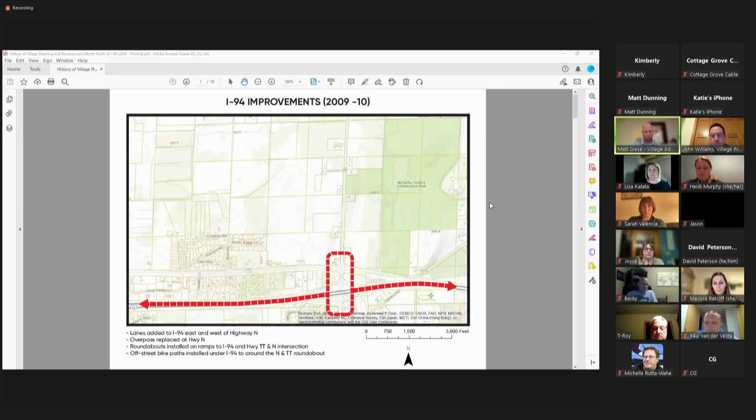The village's 2009 efforts drew interest from private landowners north of I-94, and those owners petitioned the village to annex their property into the village from the town of Sun Prairie in 2010. This was a 220-acre annexation, and as I move through these slides, please note the owners' names on the land and how these names change over time. Each landowner and developer they may work with has their own specific and potentially different development plans and concepts, but any such plan has to be consistent with the village's land use plan, which is what the village evaluates during the approval process.

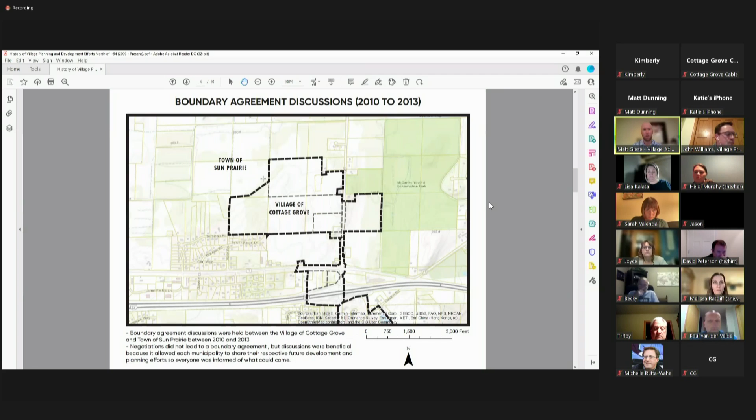Between 2011 and 2012, the village added land into our urban service area and also amended TIF district number 5. Urban service area is an approval process needed for the village to extend sanitary sewer services to a development. The process generally revolves around stormwater management and water quality. The Capital Area Regional Planning Commission reviews and recommends approval, with Wisconsin DNR having the final say.

The village also amended our TIF district number 5, commonly referred to as the Commerce Park. That's where Summit and Johnson Health Tech are located. This was done to help promote development of the 11-acre Huston site, west of the Park and Ride. To date, there has been an approved planned unit development for a hotel, but at this time that hasn't moved forward with actual development.

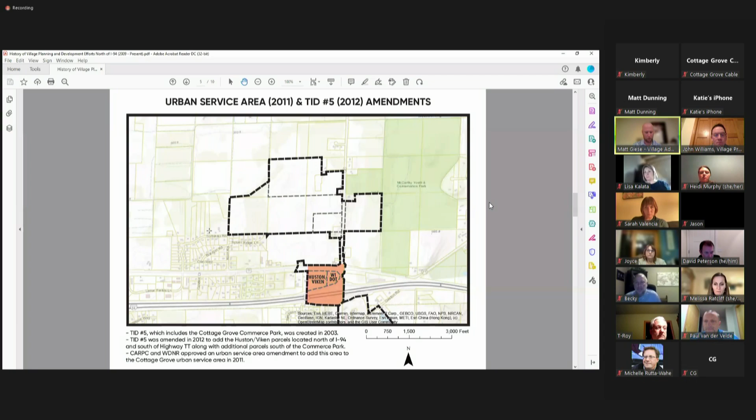In 2018, the village, in collaboration with Dane County, Sun Prairie School District, and Madison College, established the 220-acre TIF district number 10. The district was established with goals of creating significant growth in tax base as well as job creation. With the village's Commerce Park nearly fully developed, TID 10 is the village's only remaining opportunity for large-scale economic development. It's worth noting that school district boundaries are not set by the village. All land north of I-94 has always been in the Sun Prairie School District.

This is a good time to also clear up some myths that are out there regarding TIF districts. All properties within TIF districts must pay their full property tax bills.

When a TIF district is established, the property tax revenue currently being generated by the existing property continues to go to each taxing jurisdiction. As development occurs, the village gets to keep 100% of all new tax revenue. The village then utilizes this new revenue to improve infrastructure, attract development, and spend the funds on any approved projects in the TID's project plan. Following closure of the district, any remaining money is split proportionally with the village, the school district, the county, and the tech school. And then the theory is each entity is now left with presumably a much higher tax base than they previously had, but for the tax increment district.

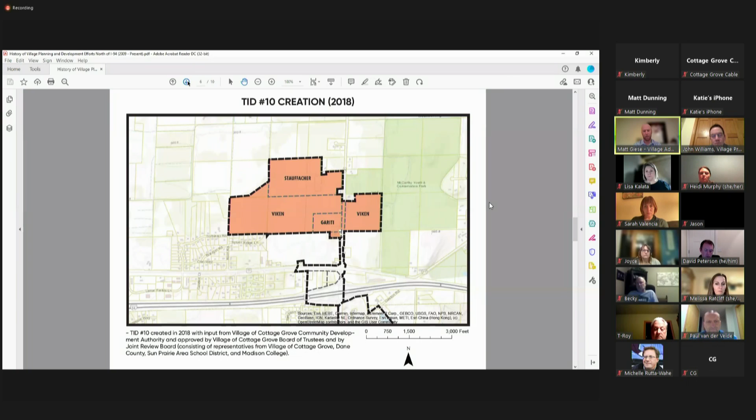In 2019, Greywolf Partners, also known as Cottage Grove Business Development, purchased about 60 acres from the Duschock family and petitioned the village for annexation into the village from the town of Sun Prairie. Following annexation, the village amended TIF district number 10 to include the newly annexed Greywolf land, expanding the TIF district to its now current approximate 280 acres.

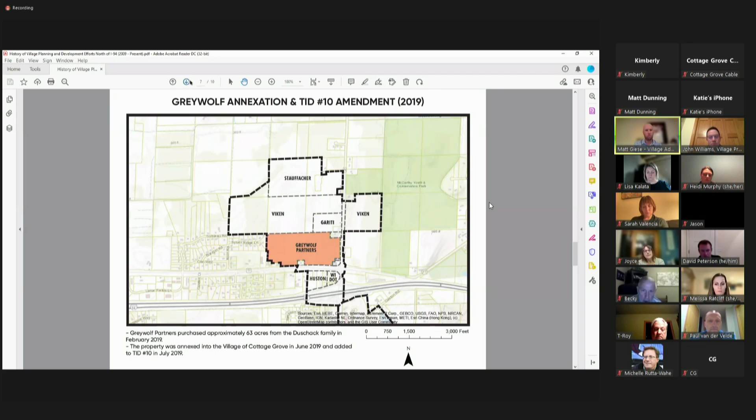Also during this time, the village went through a comp plan update process. The newly amended comp plan removed land uses that would have allowed for large-scale retail and multifamily residential uses. The large-scale retail would have included potential users such as a super Walmart or super Target. So those were removed at that time, and it was changed to just planned office and industrial. The majority of the TID remained as an area that includes warehouse and distribution, which has always been in the village's plans for this area.

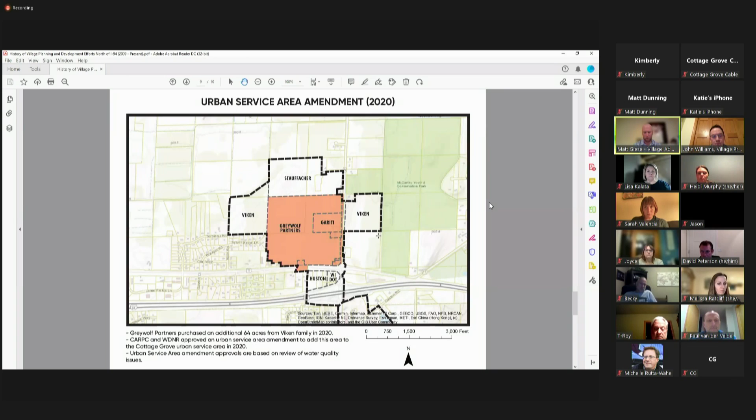In 2020, Greywolf added to their acreage in the district by purchasing about 60 acres from Mr. Viken. The village then went through another urban service area amendment process with the Capital Area Regional Planning Commission and DNR. The approvals grant the village authority to extend sanitary sewer service to develop the highlighted area.

All of the aforementioned steps and strategies have led the village to the opportunity in front of us tonight. In December of 2021, Trammell Crow Company submitted an application for planned unit development zoning to develop a warehouse and distribution facility per the village's planned industrial and office land use plans. And as you can see on this slide, the change in land ownership as well.

A couple other items to clear up. The village often hears citizens wonder why they are just hearing about a particular project now, or haven't heard about it as long as they would have liked to. This happens for a couple of reasons. The first is the village should not and cannot air or make public private landowners or developers due diligence. The village does not make a project public until the developer formally applies for a project or until a developer decides to bring a concept forward to the public for comment. This is a standard best practice for most cities and villages across the country, if not all.

The village also has ordinances that require direct notification about certain approval processes to other properties within 400 feet of the proposed project. While we certainly understand there are often people beyond that distance that would like to be notified, this village requirement is double the distance that most municipalities have for notice.

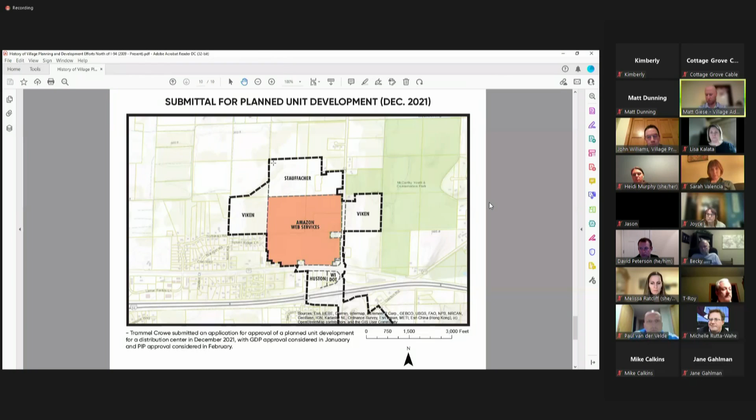Yes, the school district tax revenue would go to the Sun Prairie School District, but that is the case for any land north of I-94, and that's always been the case. As I mentioned, the village doesn't control school district boundaries. It's safe to say that Project Silver Eagle will drive interest in village development far outside of TIF District number 10, which will certainly benefit all village residents and Monona Grove School District property taxpayers.

John, I'm happy to take some questions. All right, any questions for Matt from board members?

Matt, this is Sarah. Can you just clarify, you said 4.6 million annually in tax revenue—is that before the TIF closes? That's correct, that's while the TIF is open. Okay, thank you.

And Matt, just for clarity again, through this entire process, people within 400 feet have been notified about zoning changes, all of that stuff, correct? Zoning changes, yes.

Just to add on to that, Troy, this is the zoning change. It was annexed in as rural holding, and that's what it is today until any final approval is made. So the planned unit development is the new zoning category if it is approved.

Thanks, Aaron. Any other questions for Matt? Otherwise, we'll switch gears here and move to TC, Trammell Crow.

Thank you, John, and everyone here tonight. I'm going to quickly run through a presentation and before jumping into that, introduce my team. My name is Morgan Bear-Blaska, I work with Trammell Crow Company, the developer behind this project. Here with me tonight, also from Trammell Crow, is Grady Hamilton, who leads our Midwest business unit. Adam Artz from Pinnacle Engineering is here as well.

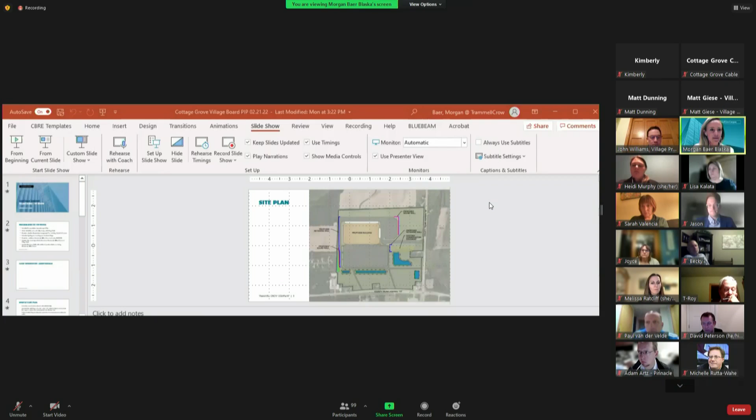He's going to dive deep into the stormwater plan and some other items in our presentation, and is here to answer any additional questions from a civil perspective. We also have Jason Banglis from the client here to share a little bit more about the client and their operations. So with that, I'm going to share my screen. Do you guys see it? Yes, Morgan, we see it. Great, thank you so much.

So what I wanted to share here to start the presentation is the progress that's been made since we were last in front of the village board for the GDP review specifically. We have submitted the transportation impact analysis, the TIA, to the village, to the county, and to WisDOT. As you guys know, for any project of this scale, this is a required step in the process and is very collaborative—we work closely with the village, county, and WisDOT on all the assumptions that go into this, as well as any final required improvements.

We want to highlight that we've submitted this, but it's very much in progress as we continue discussion with those jurisdictional authorities. Another important point is we have kicked off offsite and onsite utility design with village staff. This is not just to accommodate our facility, but really all of the options we're evaluating to service the entire TID 10, as well as the parcel directly to our west.

That's been a very important topic of conversation, and we are fully committed to supporting those village goals from a utility perspective. We've also created a detailed stormwater management plan, which is under review by village staff - this is kind of the first step in the PIP submittal. We've also included a private well memo because we know there were a lot of questions regarding that. Adam on our team will share more later in this presentation, specifically around that stormwater detail. We've also submitted a lighting plan, including spec sheets and a photometric plan to the village, since it's really important to hit all village and county ordinances, and providing this information upfront is a very important step of this project.

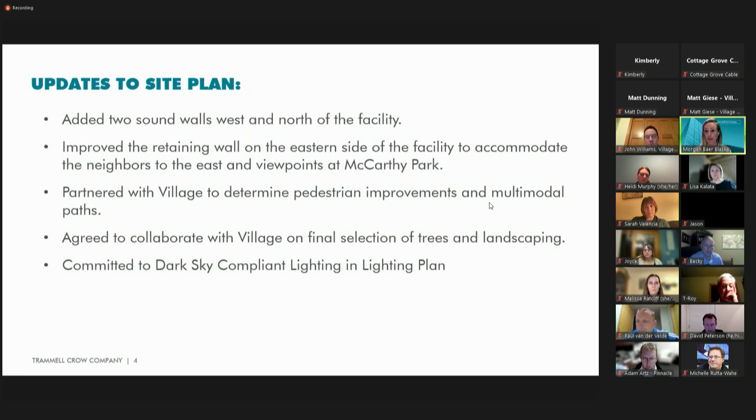And lastly, we've committed to dark sky compliant lighting in our lighting plan. This is at the highest end of visual protection, something we're committing to on all of our external outside lights. So with that, I'll show the site plan so we can see some of these elements I discussed, as well as highlight some of the other items that were originally in the design.

We'll start with the retaining walls. The proposed retaining walls on the western and eastern portions are very important. Moving from west to east, there is an incredible topo change, about a full 44 feet moving from west to east and about 20 feet just to our property line. That grade change in elevation means we need a significant proposed retaining wall to support the facility as well as our properties to the west. This also acts as a sound and light barrier to our neighbors.

On top of that proposed retaining wall, we've added an additional sound wall on the western and northeast portion of our site, as well as a landscaping buffer. All of those items are designed with our neighbors in mind to best protect from a sound and light perspective.

I want to call out this existing conservation easement, as well as the wetlands located here, which really prevent us from shifting our building footprint east. We also want to be cognizant of the residential receptors on the eastern side, and keeping as much distance from them and our truck courts as possible is an important design consideration.

To quickly hit upon traffic, which is a really important topic, this is very core to any development of this scale, and of our project specifically. Safety is the most important consideration here, and we work closely with all jurisdictional authorities to ensure that we are not just meeting, but surpassing requirements.

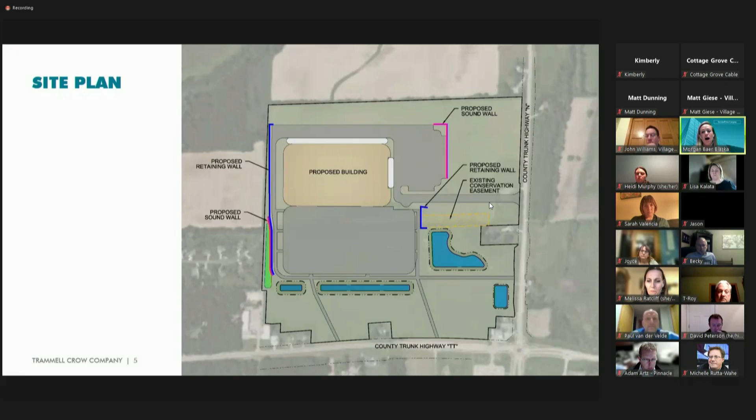With that, I just wanted to pass it along to Adam on my team to share a little bit more about our stormwater management plan and where we sit today.

Thank you, Morgan. As Morgan mentioned, my name is Adam Artz from Pinnacle Engineering Group. I am a Wisconsin-based engineer, a professional engineer, and a Department of Agricultural Trade and Consumer Protection official drainage engineer as well, so I can speak on this from a professional engineering standpoint.

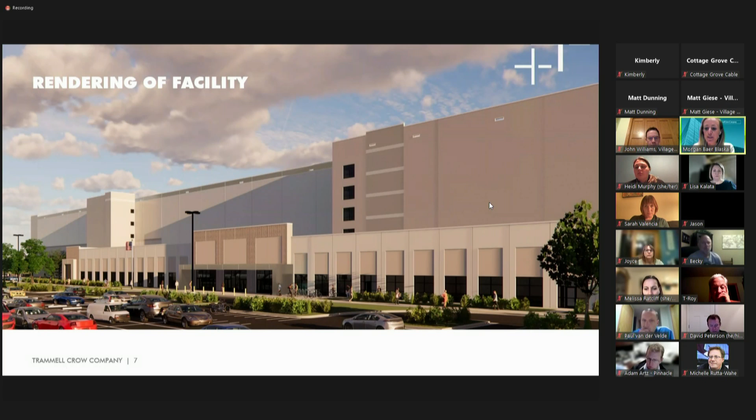So with that, here's a quick rendering of the facility. This showcases the alternating metal panels and precast on the exterior, as well as some proposed landscaping. And then these next couple of slides are just perspective views put together by our design modeling software, utilizing existing Google Maps and then our proposed facility based on the height and access points.

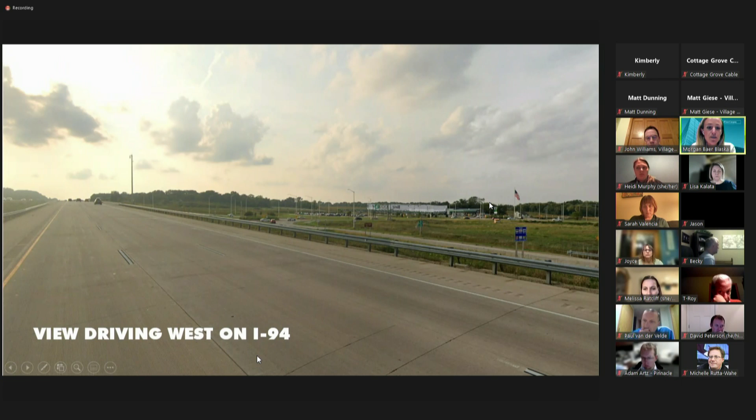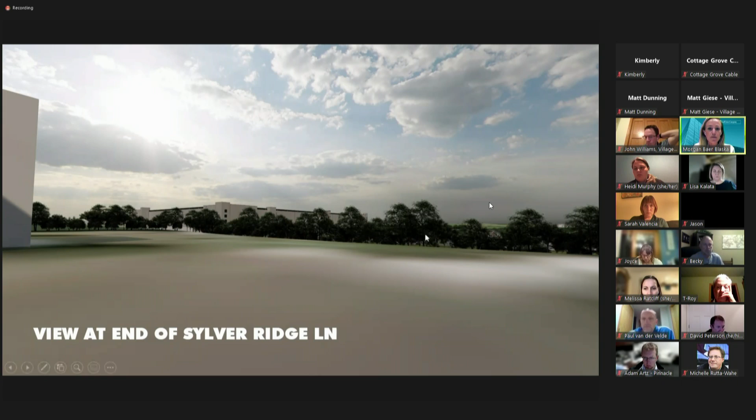And then this is the viewpoint at the end of Sylver Ridge Lane. As we noted, there's a very significant topo change, so the building sits kind of sunken within the middle of our site. One thing I want to highlight is this Google Maps photo was clearly taken when there's a lot of tree foliage, so it's a little difficult to see our sound wall behind it. You'll have landscaping, then sound wall, then retaining wall, all as barriers between our facility and Sylver Ridge Lane.

So with that, I just want to end really quickly on community benefits. I know Jason touched upon many of these items, but just to highlight before we end our presentation.

We are committing to invest $200 million in capital specifically for this project, up to 1,000 to 1,500 full-time jobs generated specifically from our project's operations. We are directly investing in improved infrastructure surrounding the site, including roadways, sewer and water utilities, and walking and multimodal paths.

The user partners with community organizations and local schools, particularly to give back with a focus on STEM education. And as Jason mentioned, there are strong career advancement opportunities and benefit packages for employees.

And lastly, as Jason Fields mentioned from MadRep, based off of their economic analysis, we would anticipate creating additional jobs above and beyond the 1,000 to 1,500 generated by our project operations, adding about 17 million in new wages to the economy. So both a tremendous amount of direct impact as well as indirect impact from a facility and operations of this type. So with that, we would love to finish our presentation and send it back to John and the village board, and we're here to answer any questions that may arise.

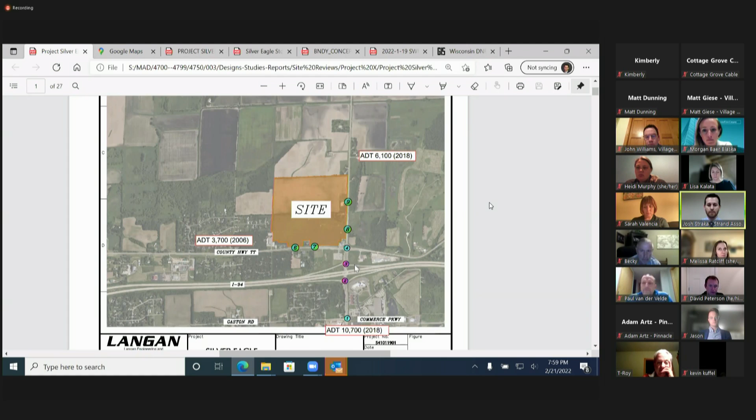Intersection 1, which was studied, is Commerce Park, Gaston, and N. 2 and 3 would be the interchange. 4 is the roundabout to the north, right by the gas station. Then there are 4 access points: 6, 7, 8, and 9. Their 5th one was the intersection all the way to the north, up at T and N.

So they studied these intersections. What they did is go out and count peak traffic periods at the intersections, really studying the amount of traffic out there today, and then applied background traffic—we'll get to that in a second.

The first thing I'd like to look at is the average daily traffic, or ADT, on N today. Right now in 2018, when the DOT last counted along the county road just north of the site, there were 6,100 vehicles. Same on TT, just west of the site.

In 2006, an older count, there were 3,700 vehicles. I still expect that to be lower than what's on N today, but it could be a little more than this 3,700 shown in 2006. At the same time, south of the Commerce Park Road and Gaston Road intersection, there's around 10,700 in 2018.

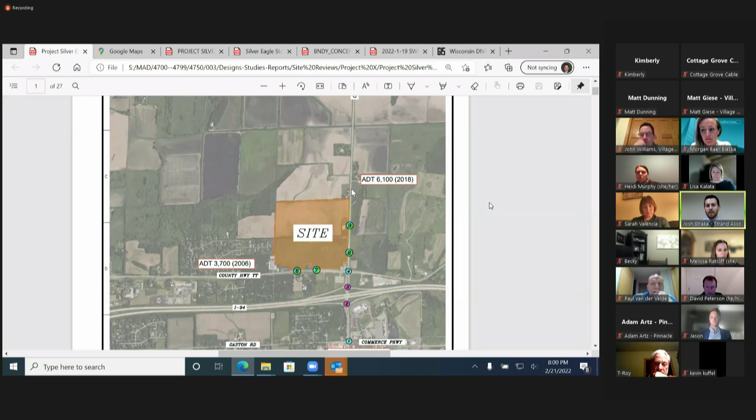Some important things to note: this rural highway, while there's 6,100 vehicles there today, could handle double that pretty easily given the amount of access along it—there isn't a lot. It could range anywhere from 10 to 16,000 vehicles a day before needing expansion. Once you're getting closer to 16,000 vehicles a day, you'd want to expand to a four-lane facility. So it can handle quite a bit more than what it's seeing today before expansion is needed.

Same to the south—this is a 4-lane facility, so around the Commerce Park area it can handle 20-plus thousand vehicles a day on that 4-lane section. So there's capacity both north and south, and obviously the interstate and interchange have been improved to handle additional capacity.

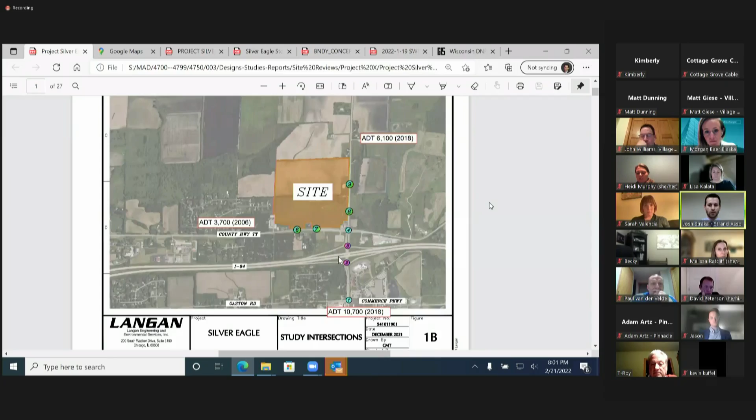Looking into their report a little further, let's talk about some of their operations. What they highlight is a staggered shift period out here, where they have half staggered shifts. In the morning, there's a 30-minute stagger between the first half of the shift and the second half, taking place around the 7 a.m. period.

That shift goes from 7 a.m. to 5:30 p.m. And in the evening, they have the same thing from 5:30 to 6 o'clock, a staggered 30-minute shift, and then they go to 4:30 a.m.

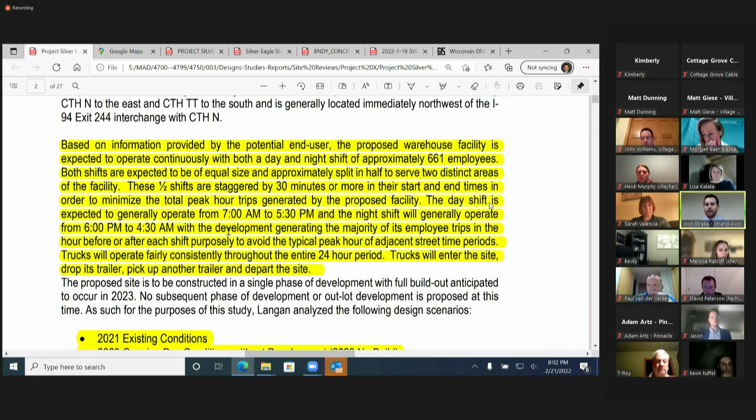The reason I'm pointing this out is when we look at these intersections, we're going to look at the peak periods. When they went out and counted these intersections, they counted the peak 1 hour of the day, both morning and night. Part of the way they're setting up their shifts is just outside of those peak periods, to help get people in and out without impacting the intersections.

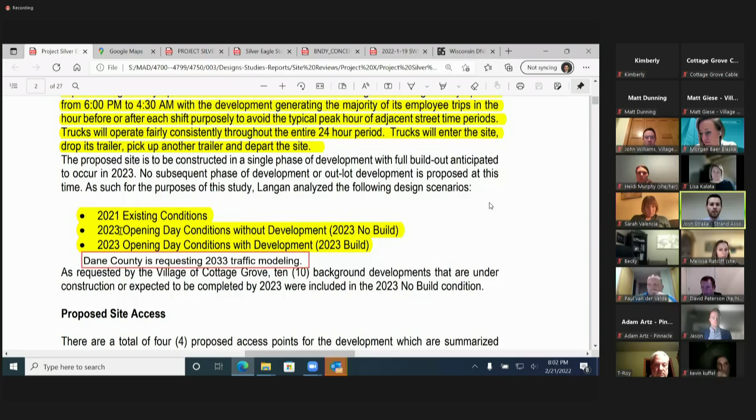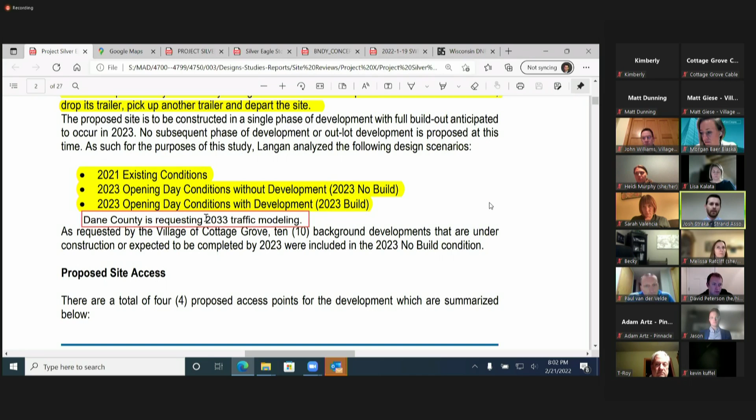So what they study are the existing conditions—what is out there when they counted it late in 2021—and what's going to be out there in 2023, both without development and with development. I'll talk about what that means in a second. Dane County is also requesting that they project this traffic 10 additional years, which is pretty common. That means growing the outside traffic 1 to 2% a year, which may contribute additional traffic at these intersections after this facility is open.

Looking at just their site, to understand it a little bit: there's 324 stalls for tractor trailers, with 57 loading docks at the site. So there is a decent amount of large vehicles that are going to be accommodated at the site.

You'll hear a lot about the 1,700 parking spaces. Sounds like a lot, and it is, but they're not all going to be occupied at once. We have to remember that staff changes are happening while people are still at work, so they want additional parking so those people can park, go inside, relieve that shift, and then leave the facility. So the parking need isn't just for the people working there, but also to accommodate overlapping staff shifts.

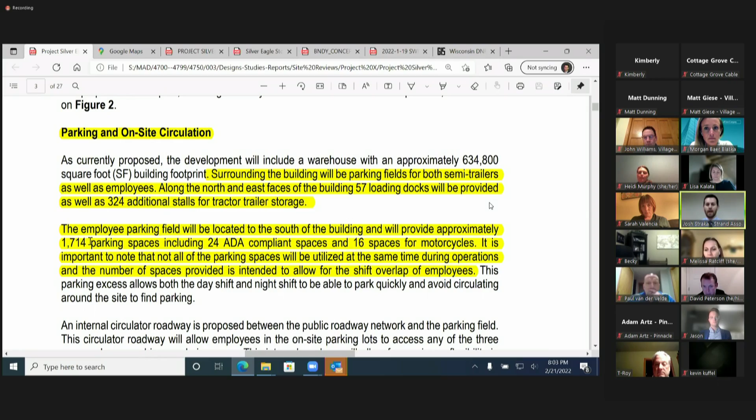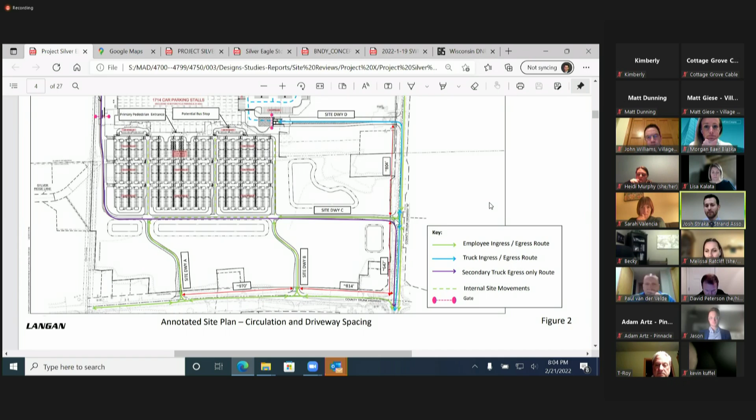The green access points are for the vehicles coming to work at the facility. They're entering at sites A, B, and C—the three different entry points—and then leaving, going back out towards either north or south along N, and east and west along T.

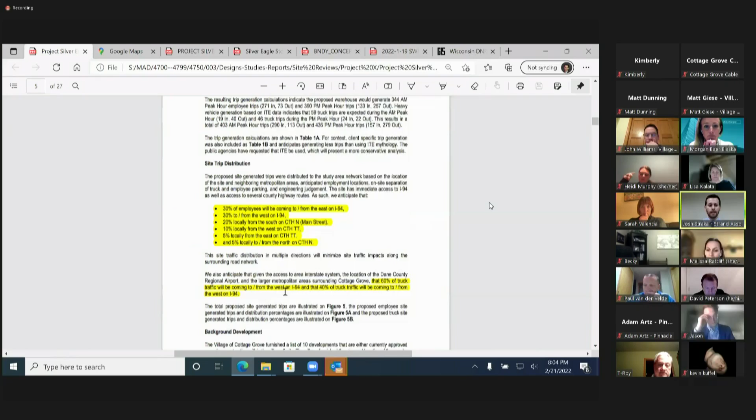Like Morgan said, their team met with the county and with us at the time to discuss how traffic would be distributed from this facility. 30% of employees will be coming from the east on 94, and 30% from the west on 94—so 60% are anticipated to come from the interchange and I-94.

20% will come locally from the south, from the village and further south on County Trunk Highway N. 10% locally from the west, 5% locally from the east, and 5% from the north. These local percentages may vary a little from one to the other, but in general they make sense for the traffic distribution.

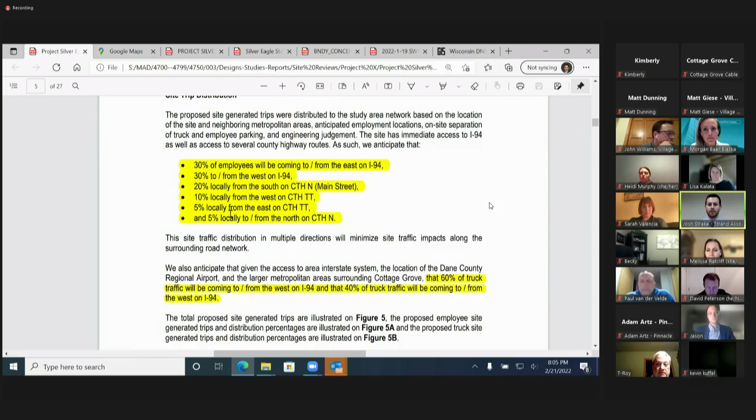Important to note, and it's been said several times tonight: 60% of truck traffic will be coming from the west on 94, 40% from the east on 94. We are not anticipating, and don't expect, truck traffic to be going north and south along Highway N.

You can imagine, for a warehouse facility, the distribution of trucks coming and going—they're going to want to be on routes where they don't experience delay. They don't want to travel through communities with slower speed limits and school zones. We agree with some of those concerns—we don't want them there either, and I don't believe they want to be there at the same time.

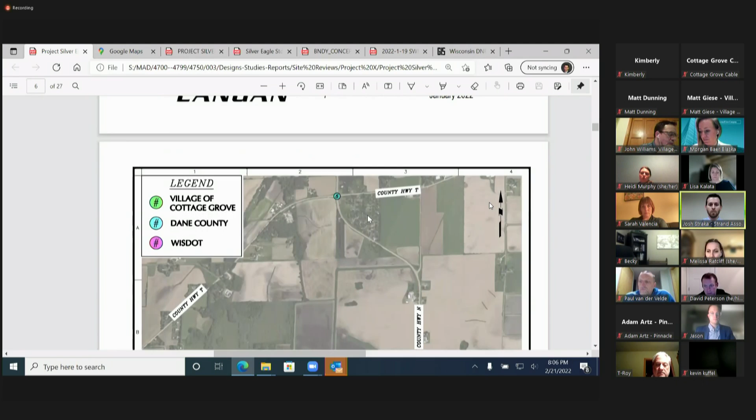Let's look a little bit about peak traffic. That's the morning AM peak. When they studied these intersections, they counted traffic from 6 a.m. to 10 a.m., and found that 7 to 8 a.m. was the peak hour—when the most traffic was at these locations.

On the back side, they counted from about 2 to 7, and found that 3:15 to 4:15 was the peak hour at night at these intersections—actually more in the afternoon than later, earlier than you might expect, like 5 to 6. I just included what they got during that one peak hour.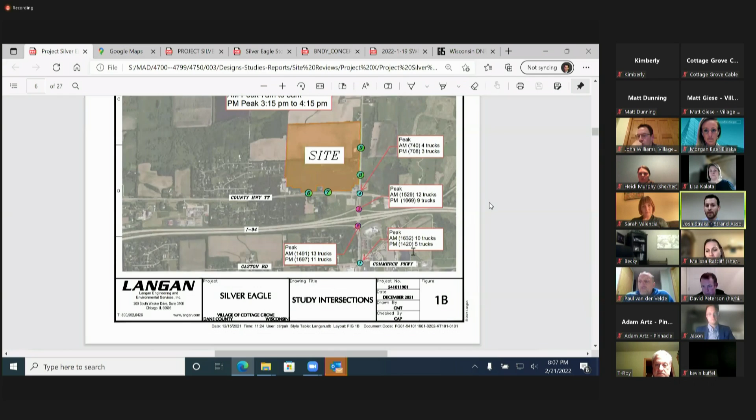So on the south, near the Commerce Parkway and Gaston Road intersection, they had in the AM 1,632 vehicles. That's moving in all directions, and that's one trip. So if the same vehicle went north and 10 minutes later came south again, that was counted as 2 trips.

It's every trip. 10 trucks out of that 1,600, and the PM 1,400 with 5 trucks. Not a lot of truck traffic, mainly probably in and out of the business park, or some large truck traffic maybe heading south along N for construction.

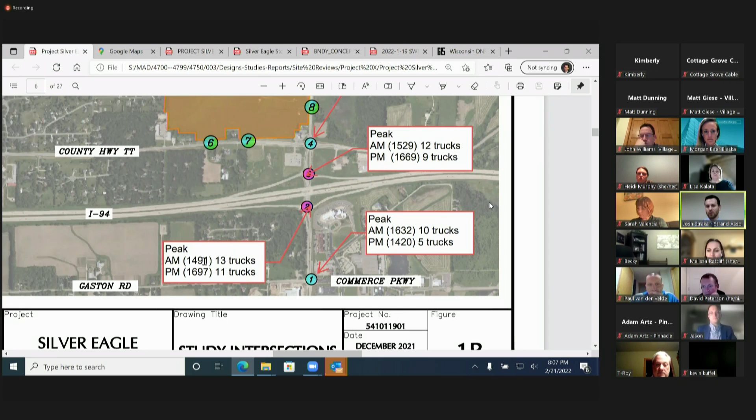PM peak at the first roundabout, 1,600 vehicles, 11 trucks; 14, close to 1,500, and 13 trucks in the morning. Same on the northern one, 1,500 vehicles, 12 trucks. PM peak, 1,669, 9 trucks.

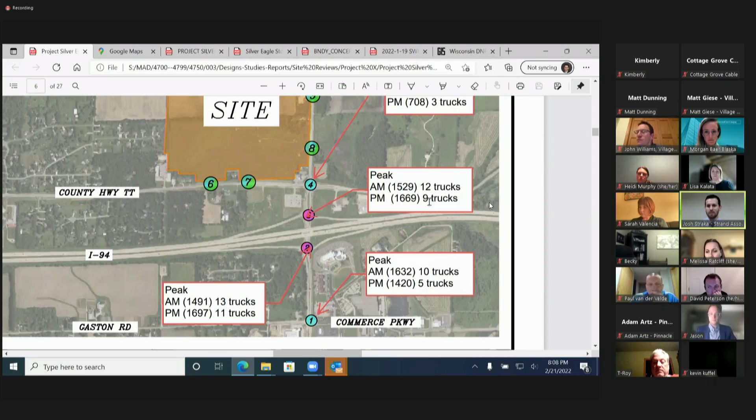You can see the traffic drops off quite a bit after you leave the interchange and go north. In the AM, there's only 700 vehicles, 740. PM, roughly the same, 708. Very little truck traffic today out there. That will increase a little bit as the site is developed. But again, the traffic here is quite a bit less than it is at the interchange.

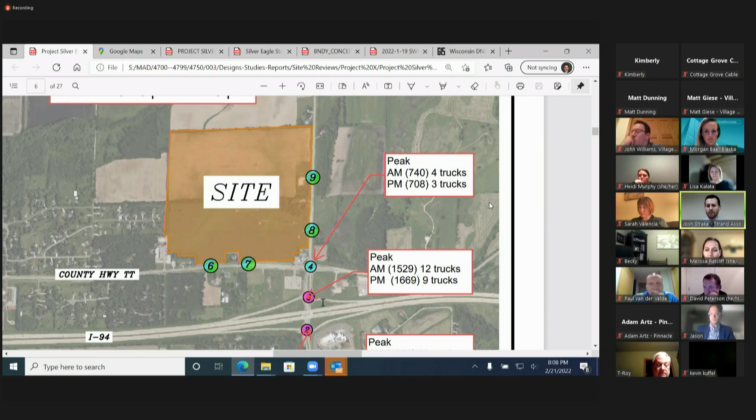So now I wanted to show, well, how does adding traffic to these intersections look? We made their team study not only their own development, but the other developments taking place in the village at the same time. So you have a list of 10 different developments that are under construction, just constructed, and that have been approved recently and will likely be fairly operational in 2023 when this facility is also functioning.

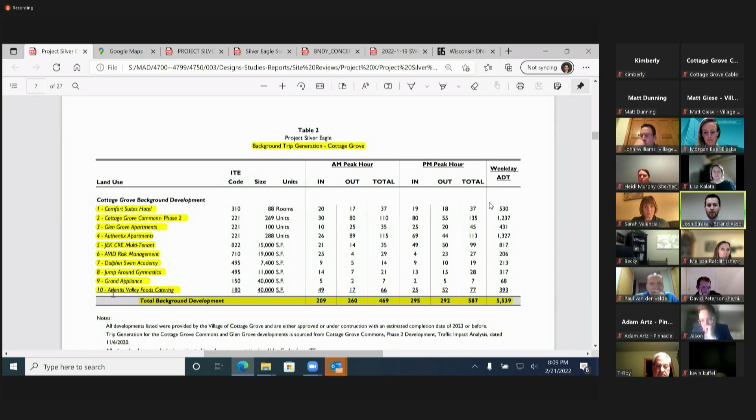And these range throughout the community. Some are in Commerce Park, some are as far south down in this Atlantis Valley. Foods is in here, that's out in Commerce Park, but Authentix Apartments is down by Village Hall. So they range in a variety of different places throughout the community.

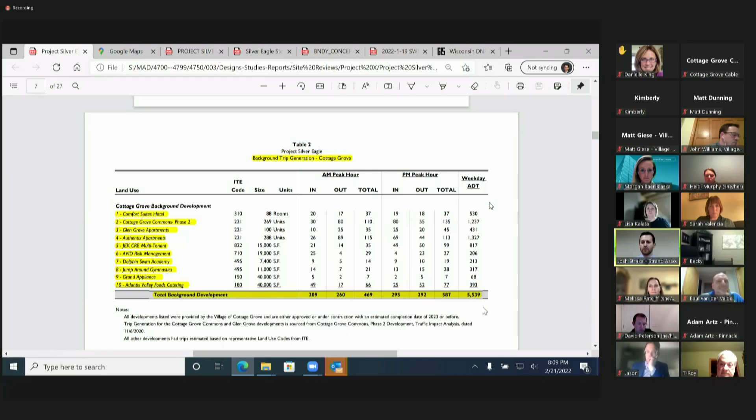It shows what their expectation for AM peak is going to be and PM peak hour, that same kind of hour that we were looking at before. And then a weekday ADT, so the total amount of traffic for the whole day that they will distribute. So roughly 5,539 vehicles. Now that's not all going north.

Some of that might be distributed south, some of that could be distributed along Cottage Grove Road at the same time. So what they're looking at is a proportion that's going to head north and mix with their traffic. So when they show the modeling, they include some of this heading north and impacting the roundabouts at the interchange, and then north of that at the gas station and the access points that they're going to create.

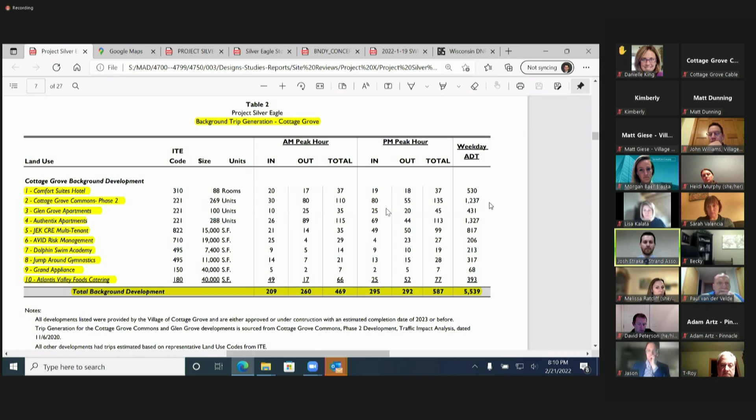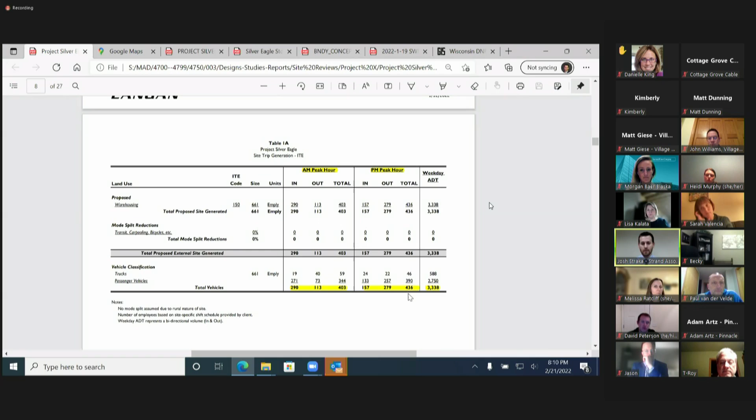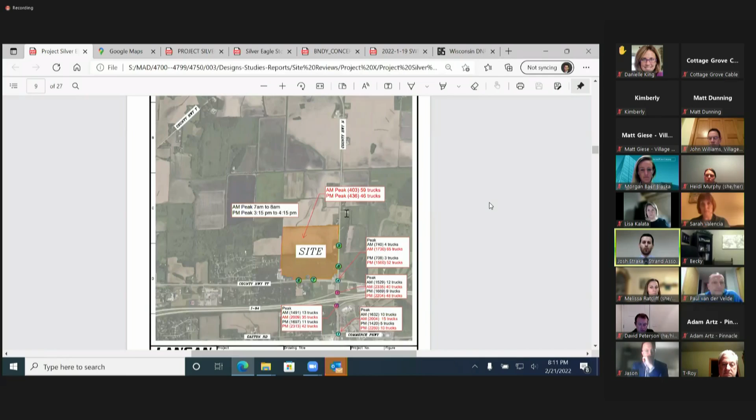So let's put that together with the traffic that you have out there today and the other trips being generated south of here, some of which will be coming further north. Let's start here at the bottom. What you have today in the AM is 1,600, remember, at Commerce Parkway. With all the trips south of here that would be generated and their trips heading south, it would be 2,004.

And not many of their trips are projected heading south. If you recall, only about 20% of them were coming from the south to their site or leaving and going to their site. Truck traffic is going to stay relatively the same because we aren't anticipating trucks heading south at all along Highway N. The only reason the trucks increase a little bit in the AM and PM is that vehicles coming in and out of Commerce Parkway with some of the other development taking place.

At the interchange, again, 2,000 vehicles in the AM, 2,300 in the PM. It's increased fairly the same. The truck traffic is more, and this is where the trucks are getting on and off. Both at this interchange, you can see they're higher in red, and then also on the northern interchange, they're higher in red.

And that makes sense. That's where the trucks are coming on and off and going to the Amazon Project X site and then leaving at the same time. Again, that's where you see the truck traffic pick up at the 4, right at the BP roundabout there next to the gas station. The traffic also increases here.

Instead of 700 vehicles a day, in the morning it's 1,700. And that's not all from their site. Remember, in the AM peak, they're only generating 400 of those. A lot of it is also from all the development taking place south in the village, from some of these other developments you'll have along these corridors as the village grows.

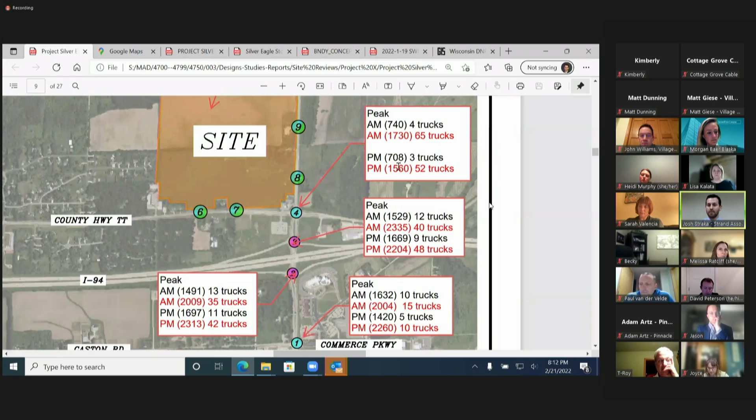And then in the PM, the same thing: 700 vehicles typically today, and then 1,500. Now, this is the average day, right? Some days are going to have a little bit more, some days a little less. We can only model for the average day.

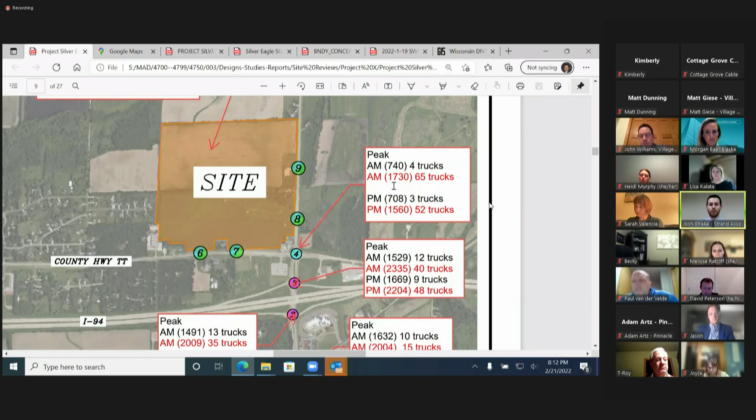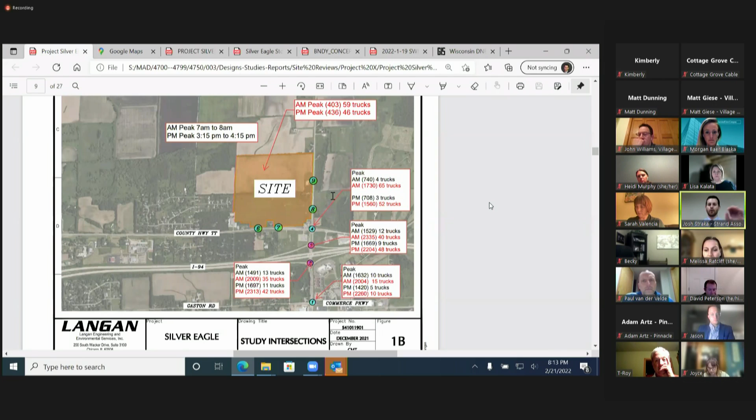So with that, I want to show you what that does. They take all of this information, the background information, the trips they're generating at their site, the existing trips out there, and put it into modeling. There's a lot of numbers to go through. That's where the 180 pages are generated.

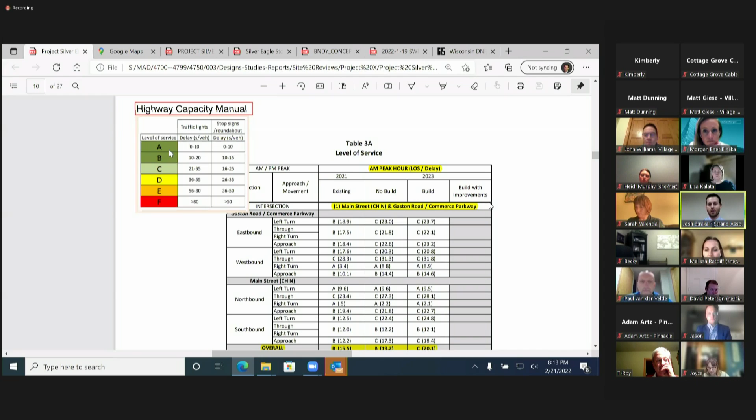We're just going to talk briefly about some of the modeling, starting with what is called the Highway Capacity Manual's level of service. It's a nationwide level of service, and what that means is delay - how long are you waiting at a location or an intersection. It's just like your grades at school, except there's an E in here. A, B, C, you're all doing good. D, E, F, you're starting to get pretty bad.

Really, when we look at intersections, when they hit level of service D for delay, that's when we think about what kind of changes can take place - what do we need to improve at that intersection to make it function better. A level of service D at a traffic signal is different than at a stop sign or a roundabout. We don't like to wait as long at those.

So level of service D is at 26 to 35 seconds of delay, and for a signal it's 36 to 55 seconds. Now, what's important to note on level of service is this is an average. So if I go to a signal, one day I might be 15 seconds, the other day I might be 60 seconds. It's kind of an average over a week, two-week period at that location. It's not that every time you go there you should expect 36 seconds on average - it's an average type of waiting.

So what they did is look at each of these intersections. They took the peak hour - in this instance, this is Main Street and Gaston Road, Commerce Parkway, down at your traffic signal today. They looked at the existing condition for each movement - left, right, eastbound, westbound, every movement possible there - because they counted those and then projected the traffic out, and get an overall level of service.

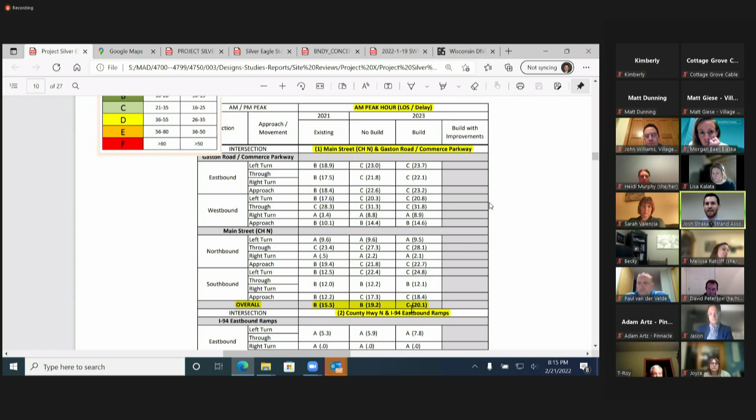So today it's at 15 seconds, a level of service B. It's functioning very nicely. With no build of the Project X site, but growth throughout the community, you're still at a B at 19 seconds. When you build the facility to the north, you get to a level of service C, but it's just over that threshold - it goes from 19 seconds to 20 seconds. So it's a very little increase in this case.

And we could go through all the AM and PM peaks - they work their way to the next intersection here. So for instance, here's the eastbound ramps, AAA. The ramps have been designed for this traffic when they came back through and the state improved them. AAA at the northern one in the AM peak period - very little change you're going to see at that.

The county highway roundabout to the north also has - the N and TT to the north has good service at level of service A, both existing and with the proposed traffic. There's not much change AM to PM peak. The only delay that starts to pick up, and I think it was questioned before, was the approach westbound. So as you're getting off, David, I think you asked this question before.

As you're coming from the Milwaukee direction and getting off at that interchange, wanting to go right, left, or through back down to the community, you start to see a delay there. That continues to get a bit more as traffic picks up along these roundabouts. You tend to stagger back up the interchange. It doesn't seem like a long queue, and over time that should disperse nicely, but you will have a little more queuing at that location.

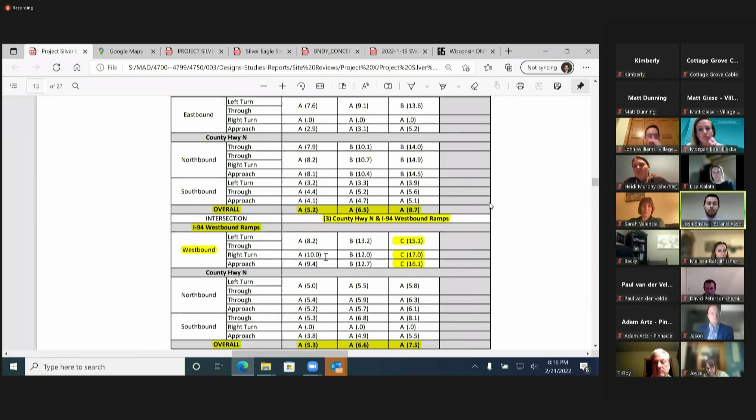We've asked the design team to look into that a little more as they finalize this report. And it's important to note the state is looking at this and the county is looking at this at the same time, so all entities are reviewing these facilities.

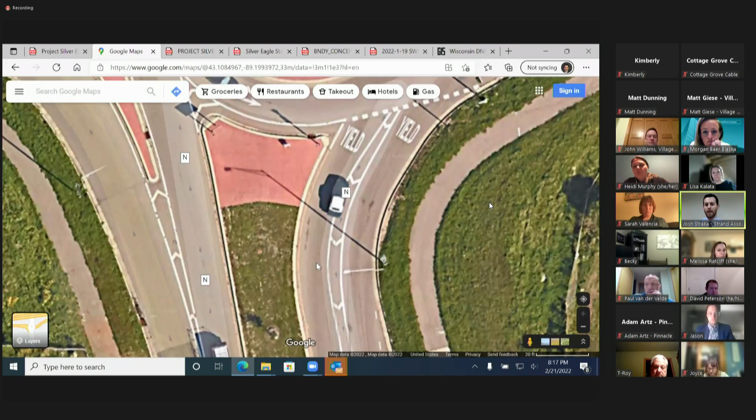There's been a lot of talk about trucks, so I want to point out roundabouts and trucks. I do a lot of roundabout work for the state and other states, and it's important to note these roundabouts were designed with trucks in mind. They provide what's called a gored entry, giving more space so a truck can track into the gore without pinning the vehicle on the other side, widening the entry with gore striping so the truck can track there.

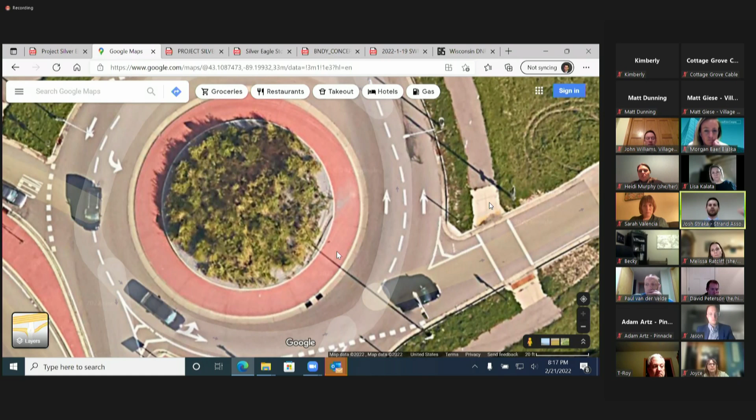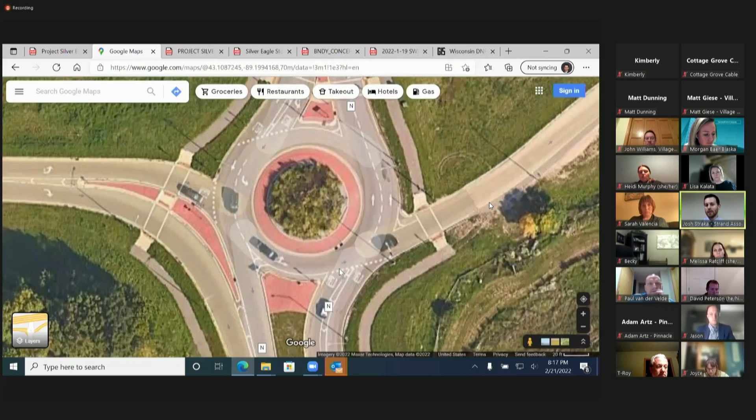They also provide truck aprons. It's common for people to say the truck is tracking over the curb and wasn't designed for it, because it goes onto the curb section. But it's supposed to in this case — trucks are meant to track in this colored area, the truck apron, so their rear tracks over it. The reason it's there is so vehicles can't go flying straight through. It provides a bump out so vehicles have to go around it, slowing them down, but trucks are allowed to track over it. That's true at all of these locations, so it was designed with trucks in mind.

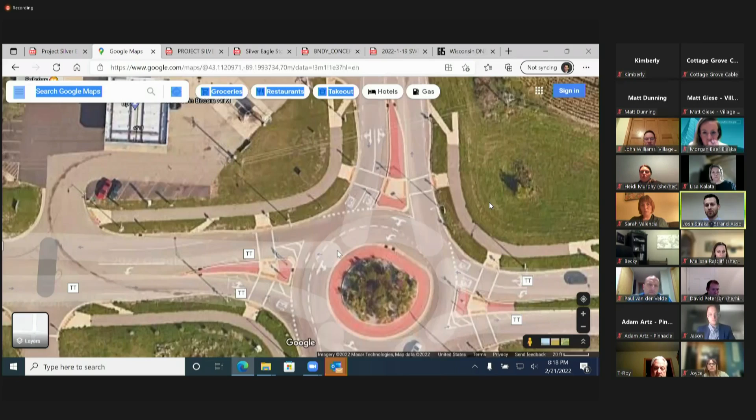When you get to the northern one, it narrows down to single lanes, or multi-lanes that flare out at the entries. You have to give room for trucks at roundabouts — they will dominate both lanes if they can, going through and using the space to navigate through. We have to give them the way at roundabouts, and that's the case anywhere in the state.

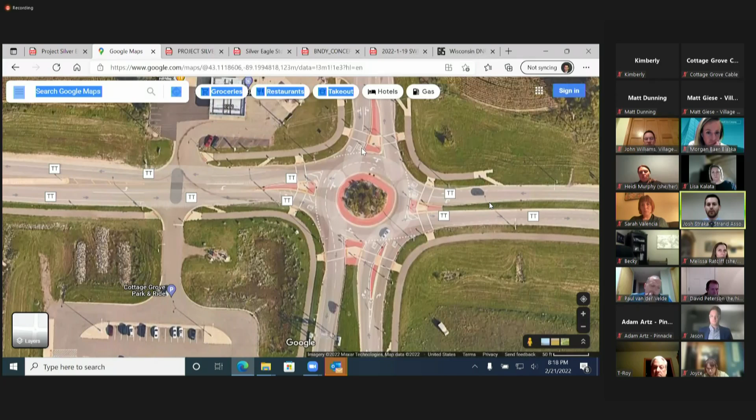Jumping back to go through the traffic — last thing to look at, we can come back and talk numbers, but it's their access points. So their furthest access on TT: you have the roundabout, then the first access, this is the second access, the furthest to the west.

There really are no improvements needed on TT — it functions nicely the way they've modeled it. They have a right and left out of their facility. We're suggesting they tack on a little right turn bay here so that as people try to turn into the facility, through movements aren't waiting on them or potentially hitting the brakes and causing a rear end accident. So a minor adjustment there.

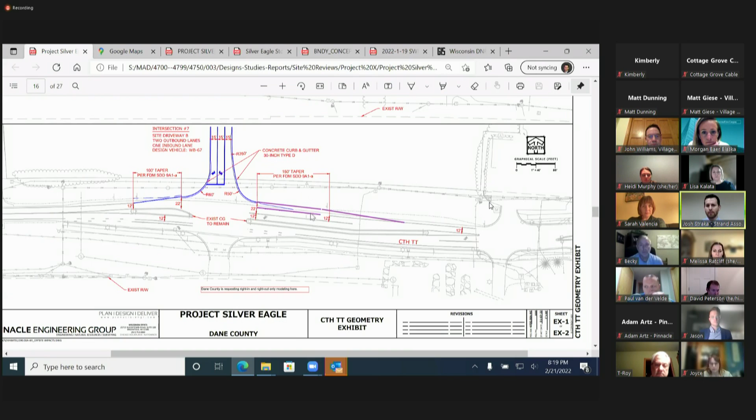Same thing here from the gas station as you're leaving the roundabout and coming to their first access on TT — it's set up for a through and left into the facility. They have a right only turn into what would be other development here. If somebody's trying to turn left, they can go around them, which is nice instead of waiting for a left turn vehicle.

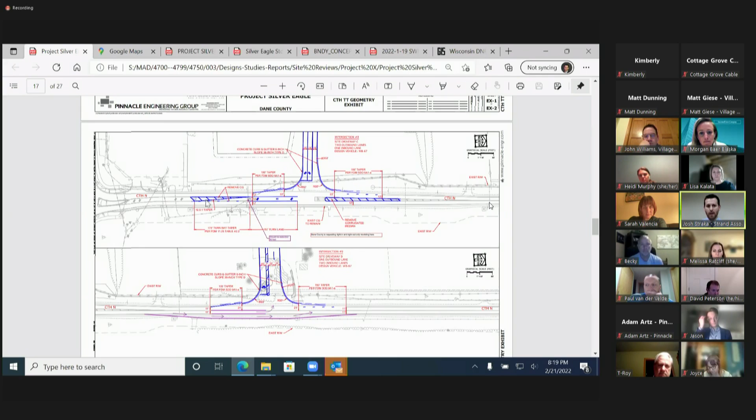We're again asking them to add a right turn tack-on bay there, in purple. Then heading up N, coming from the south, here's the roundabout on N — heading north along N, they're providing and carving out a left turn bay. Today at the gas station there's a two-way left turn lane, sometimes called a twiddle, where vehicles can get into this left turn and go into the gas station. They're just extending that — we're asking them to take it back further, extend it 50 feet, so this turns into a left turn bay where they can store their vehicles and make their left-hand turn.

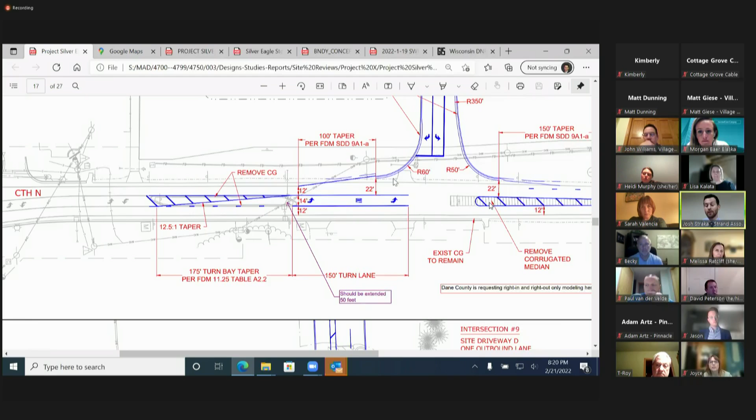Again, this is only supposed to be for employee vehicles, not the truck access at this point. We'd also suggest maybe a little tack-on right turn bay just for the employee vehicles coming from the north here. And then finally, the furthest one to the north on Highway N.

It's important to note they've shifted this access point further south. The reason they did that is to provide adequate stop sight distance. So when people are coming over that approach from the north, there's a hill there. As they come over that hill, they can see a vehicle that's turning left, or another object that could be at this intersection, and they have enough time to react and stop.

And then they also, what we're asking, is they provide a left turn bay here for their truck traffic so that through movements can get out and around them.

They're still exploring some things here. There's talk about a potential roundabout, some other stuff, and we're working with the county to get the right improvements here. Remember, the county has jurisdiction on all four of these access points as far as what the improvements look like on the county highway. The village has the right to provide that access point and the number of access points for this development.

So it's kind of a work in progress, and the county has made some comments too that we've included as part of our report back to Planning Commission.

I wanted to point out traffic overall because there's been this thought that there's a lot of traffic generated by this facility, and there is going to be traffic generated by the facility. But prior to this, Gray Wolf had a number of proposals that they were pushing forward, and like Matt said, we get a lot of different proposals and things that were taking place at this site.

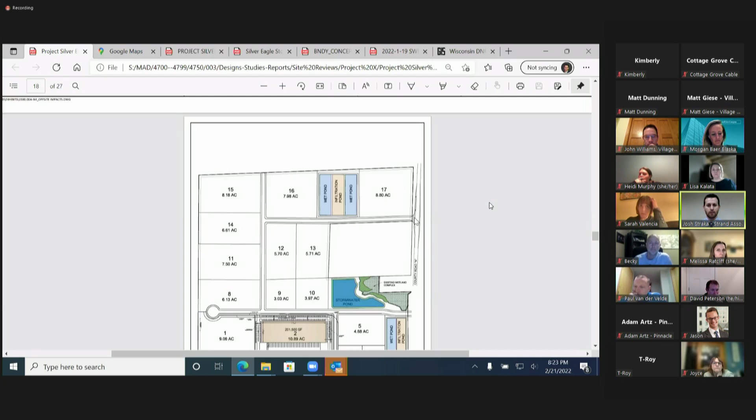But as far as traffic here, they had a big user that was going to come in, and then they had the rest of the site parceled out to be used for more development. Five access points: one, two, three along TT, and then two along N, one here and then one further to the north. This northern one would likely have had to have been shifted further south because of the sight distance.

But the traffic generated from these three access points on TT, and the two additional on N, in the peak periods that they were projecting, it was going to be 825 vehicles. And in the PM peak hour, they were projecting 1,220. That's double what Project Silver Eagle is projecting in the AM, and over three times higher in the PM. Some of that is because this is a facility where they're coming and going with large shifts.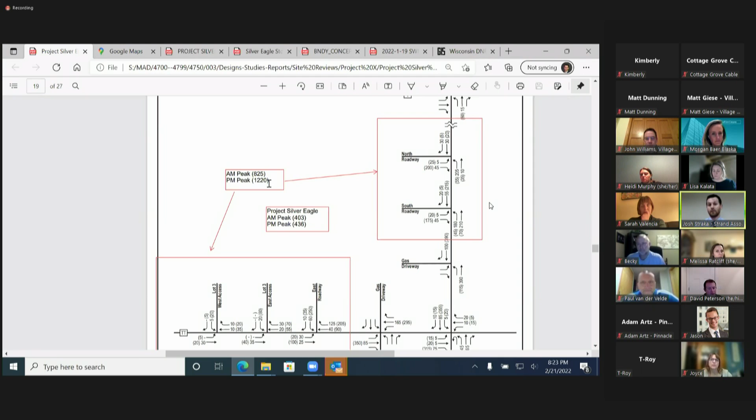And second, if you've looked at their site, there's a good amount of their site that is not developed here, planned to be developed at this point. If it would be further developed someday, that would have to come back, like Aaron said, to Plan Commission, where we would have to look at these intersections again and make improvements if needed. But the way they're proposing now in their land development, the traffic they're projecting is quite a bit less than what it could have been with prior proposals just six months ago.

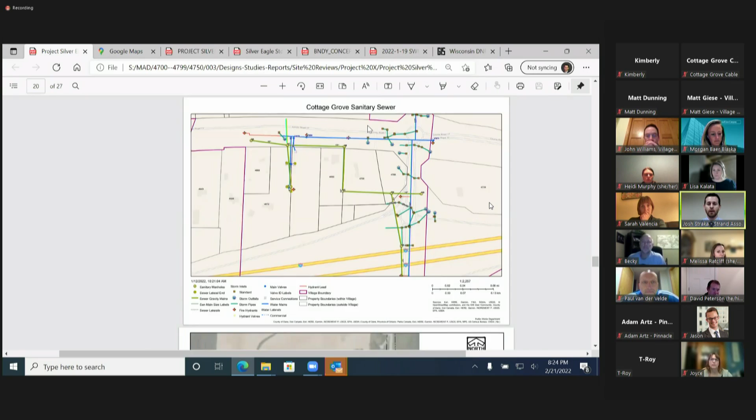So I'm going to move on to utilities real quickly and the connections for utilities. Here is the GIS for the village. Here's the roundabout by the gas station that's just to the north.

And there's water in blue that comes up and goes along TT here and just goes a little ways to the north on N. And then sanitary is this lighter green that comes up, crosses the interchange here, and then comes up and over to TT. As part of this, there was a little stub brought across TT, and we'll talk about that stub in a second.

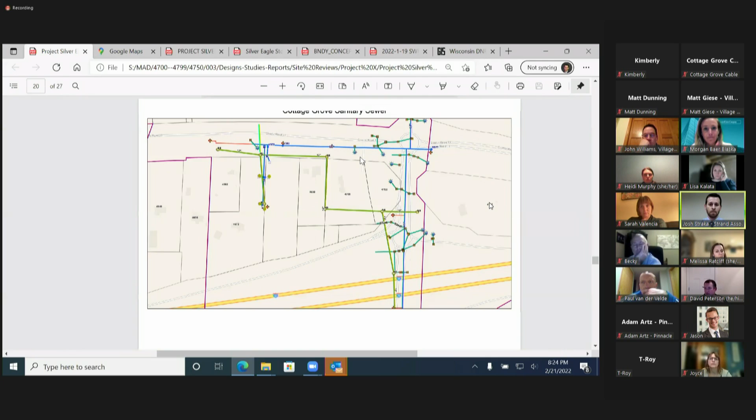Water and sewer is right at the intersection by the roundabout and doesn't extend too much further north at this time. What was designed was extended to pick up the rest of the TID area as far as capacity is concerned.

As far as the site right now and what was proposed as far as the PIP, sewer in green was going to come out and travel down along N, and blue was going to be the water main that would circle the site and come back out on N as well as part of the facility.

This would likely have required a lift station on the corner, then lifted back up and over to the gravity sewer on the other side of the roundabout. They couldn't quite get the grade to work from here up into their site with their facility as proposed initially.

We've since started working with them, and it's still in the works as far as utilities are concerned, exactly the extension that they're going to need.

But we'd like to come off the gravity sewer on TT and come up along this side of their development to serve them by gravity here if possible. They're still looking at their facility to see if they can get to gravity here, but this would also provide gravity service to part of the TID to the west, which is important to try to serve as we figure out how we're going to serve the rest of this TID as part of this project.

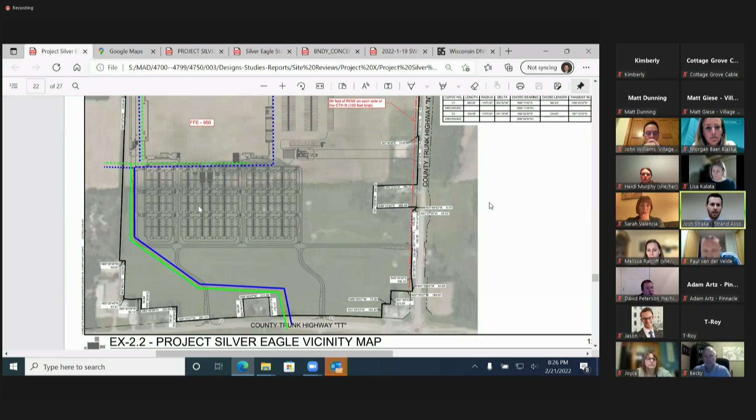Water would come up the same way and circle their building. Let's step back before I look at the rest of the TID and talk about water at their facility.

Early on, it was asked, would they need their own well? No, they are making a full connection to the village's water system. It will come out, they will connect to it, and they will loop around their entire site.

Their entire site will have hydrants spaced at around 400 feet, which we're recommending. They're very close to that already. There's a couple small hydrants they'd have to remove. The hydrants are set a little further away from their building so they can be accessed by emergency services all the way around their facility.

They do have access all the way around their facility for emergency services from different directions at the front, back, and sides of the building.

We also looked at their interior fire protection plan, and it was quite intensive. They use this plan throughout their facilities across the nation. What it does is create kind of a two-safety type system.

They take all of the village's water and have that available with our excess capacity at our hydrants and our reservoirs. They look at our wells. We work with them to look at what kind of fire capacity we would have, and we have ample service to provide them with fire service if all of their sprinklers or their system had to be activated at their facility. As a redundancy, they take it one step further.

They put their own reservoir on site. They fill it with water from the village, so it's filled day one as part of that on-site system, and they have a second system, a second pump, and a second backup generator in case of power failure for that system. If the village's system went down, they could then have enough water to provide the second system on their own. So it's kind of like a double safety net.

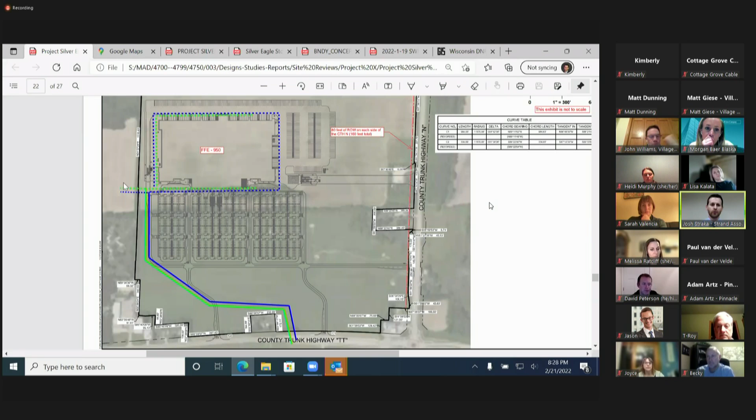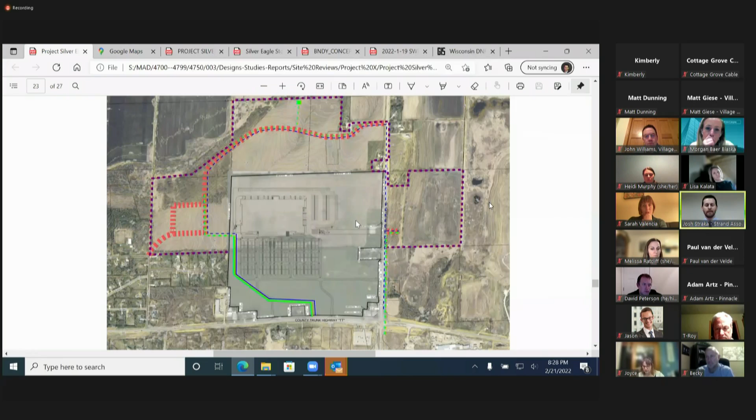So looking a little bit more at the sewer and water, how are we going to serve and access the rest of the sites that surround this TID 10? What I did is, as part of the plan commission, they said they'd like to see this a little bit more in the thought process of what we've been talking about with other development taking place, and with the project site, the Project Silver Eagle site, here today.

Sometimes I call it Project X, and that's what I've had in mind early on as part of the project, so I apologize for that.

So you see the sewer and water as it comes up here and connects in, and this red lined area is proposed right of way for roadway. We've gotten some plans as Mike Calkins came on and a few different development team members, Viking came on.

Deacon and Houston's came on to talk a little about development of this parcel. We've been working with them to understand what they were really going to do here, and how they want the circulation road to develop. They definitely want an access back to the north, which we agree with.

It could come back and connect over to the Township Road area to the north on Highway N. It's about the same distance from the high point here as to the access point for the Project Silver Eagle site, about the same distance south over that hump to the other side.

What we're showing here, dashed in blue, is a potential water loop. Water could be looped around and brought back down so that it's all connected. Then there's a potential gravity sewer, which could come up and serve a majority of this site by gravity without a lift station.

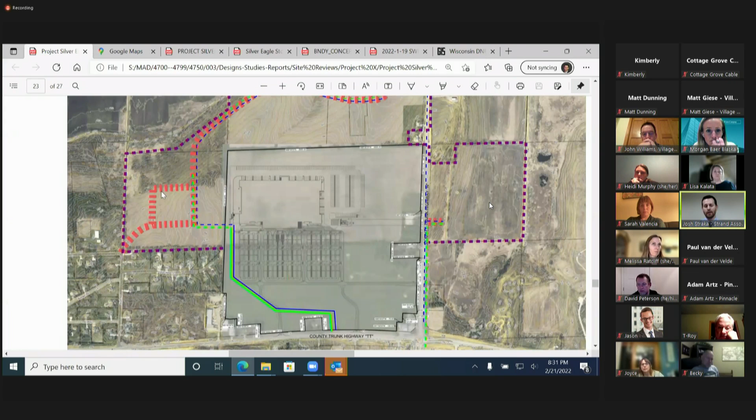Now, there's been talk about a second access to this site, and it could happen in a different manner along Elvin Road. We know there's a little bit of right of way potentially here for something. If it couldn't be a full access, it could definitely be an emergency service access. Mike Calkins talked about ordinances and variances, and maybe an emergency service access helps with some of that.

They've proposed some accesses through this site, but it's tough with a retaining wall and sound wall, and what Project Silver Eagle is trying to do for noise separation from the residential parcels here. There's also a big grade change, so almost all of this would have to happen at the same time to make sure coordination of access here is viable.

There was also some access thought along the northern end here, but part of the challenge is connecting back to this truck access, which is really hard because, as Morgan talked about before, truck and vehicle separation is very important for safety with the amount of trucks coming through here into this site.

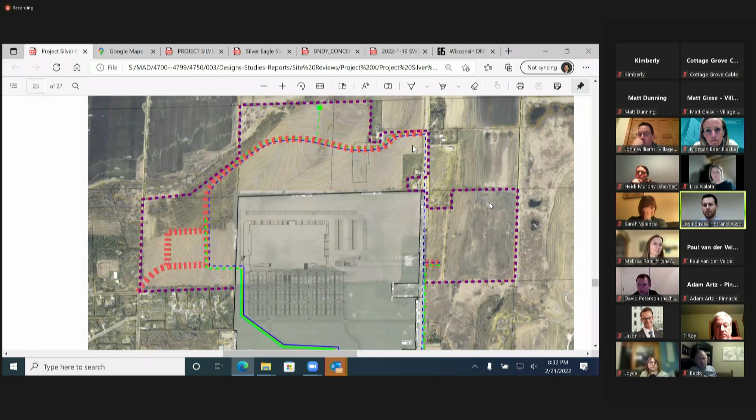We would suggest you probably don't try to intermix vehicle access for the rest of this development with that truck access. The idea is to get trucks off the interstate and into the site, away from other vehicles, in a very efficient manner. So we'd suggest not mixing them with traffic here, instead taking them to the north, at least as things are planned now throughout the rest of this TID 10. We're still talking about that as plans and final engineering come to fruition.

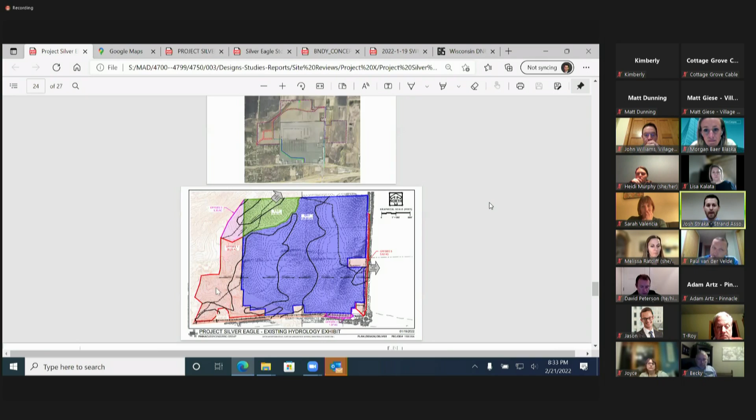So real briefly, stormwater was covered fairly well by Adam. The different watershed areas here, the red and the pink, are draining from what is part of the Town of Cottage Grove into this site. It's important to note there's a little bit to the north heading north that will also now be picked up as part of the site. It all travels across a large box culvert here, 36 by 60.

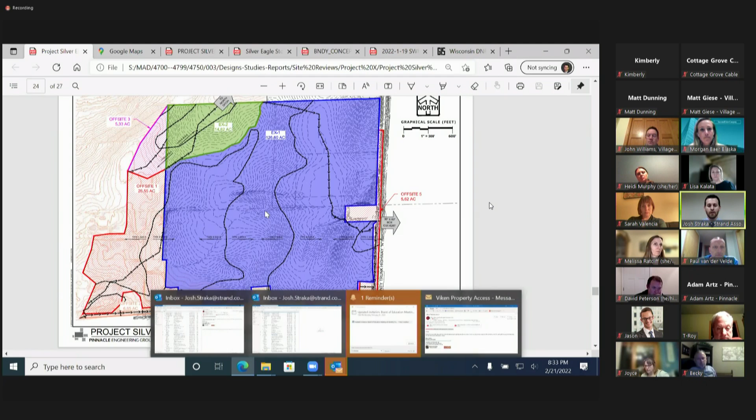There's no change in that plan. Everything that's generated on site will be captured on site, retained on site, and then released at a rate that is just like the farm fields are today. That's the requirements of the county and of the state.

I wanted to briefly show, Adam didn't show it, but he talked about the 3 ponds. They're in the same location where that water travels through the site today. It travels along this side and then goes through the culvert, so the ponds are in that same area. They are all interconnected, so as one pond is drained here and another is drained to this pond, and the rest of this facility drains to the third, but they're all connected to each other.

As they overflow, they overflow into each other, and they still overflow and drain into the lands to the east. When I say overflow, they are designed for the 1, 2, 10, 50, 100-year, and 200-year storm, which is a new requirement, the 200-year storm for Dane County. It used to only be the 100-year storm.

And these 3 ponds are clay lined. What he meant by that is they're clay lined, so you don't get any infiltration at this point. They want to hold water. They always have water in them.

When there's a small storm event, the water collects in them. The sediment, the total suspended solids in that water, settle out into the pond. That's where you'll also have your nitrogen and phosphorus and things that contaminate your wells. Your oils and grease are picked up in the green areas prior to that. They all settle out into the ponds, and then the water continues through the ponds and into the infiltration basin.

That infiltration basin is typically dry, and then it fills up during small rain events, and it basically drains the water back into the groundwater so we can get the water back into the groundwater as it's meant to be. And then during large events, it does overflow and overtop back and across into this facility, as it did in the past across Highway N.

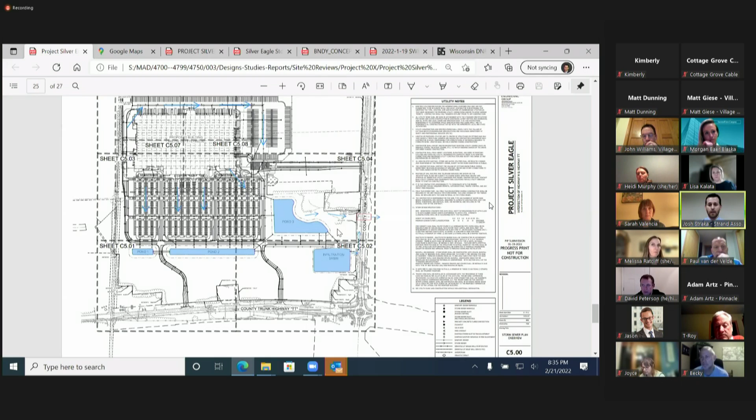So that wraps up the stuff I wanted to cover besides lighting and noise, and we're still waiting. We did receive the photometrics on the lighting side, and Morgan, we haven't gotten to them yet. I know we were sending them off late last week, so we will review those. We've been talking about dark sky compliance. And on the noise side, as Adam mentioned, we'll also help review what we can as far as the noise walls and what they block on the site.

That's all I have, John.

All right, thanks, Josh. All right, with that then, any questions from board members or Morgan, Adam, Jason, or staff at this point?

This is Sarah. I've got some, and I'm not on the plan commission, so I'm sorry I might have more than others because I've been collecting some of my questions.

So my first one is around traffic, and this might be answered by a number of folks. I was able to talk with the mayor of another village that has an Amazon distribution center, and they talked about truck queuing being an issue. I would like you to address, if you could, how many trucks can queue in that driveway, and how many trucks would you anticipate needing to queue at one time? In hopes, obviously, that they wouldn't be queuing on Highway N. Could you talk about that at all?

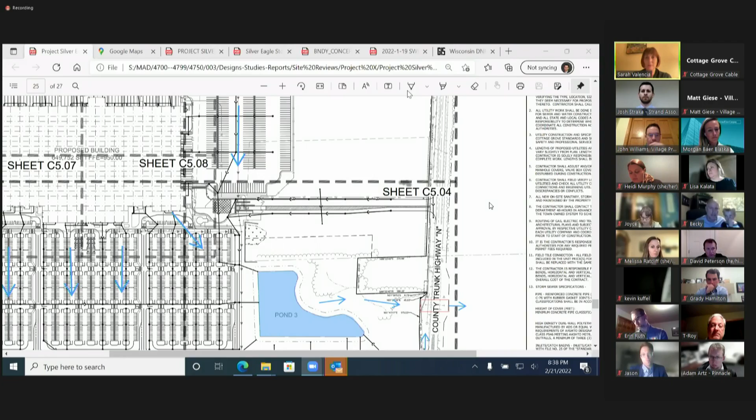Thank you, that's helpful. You're saying 100% of the traffic will go on the interstate, but how will you make sure that is the case? I know there's talk that they wouldn't want to go through town, but I'm trying to understand how we can ensure that, because that is a big worry.

Yeah, of course, Sarah. One important clarification is that passenger vehicle traffic, depending on where those jobs are coming from, will be coming north and south. I just want to highlight that.

From a truck perspective, based on all of our modeling and the destination and arrival points, we anticipate 100% of that traffic to go directly from I-94. One important point is that from an operations standpoint, starting and stopping is actually the biggest issue with these types of trucks. Going down county roads that require stoplights, stop signs, or slowing down is a huge operational issue, so in large part that is why we've strategically located with direct access to 94. That's the most important highlight operationally.

We do not anticipate any traffic to go north or south of the freeway, north of our site or south of the freeway. Adam, anything else to add on traffic flow? The only other thing is the type of facility this is. It's a distribution model. The product is coming and going from known facilities. This isn't going to deliver to a house or anywhere else. The interstate is really the mechanism that gets product from point A to point B and vice versa.